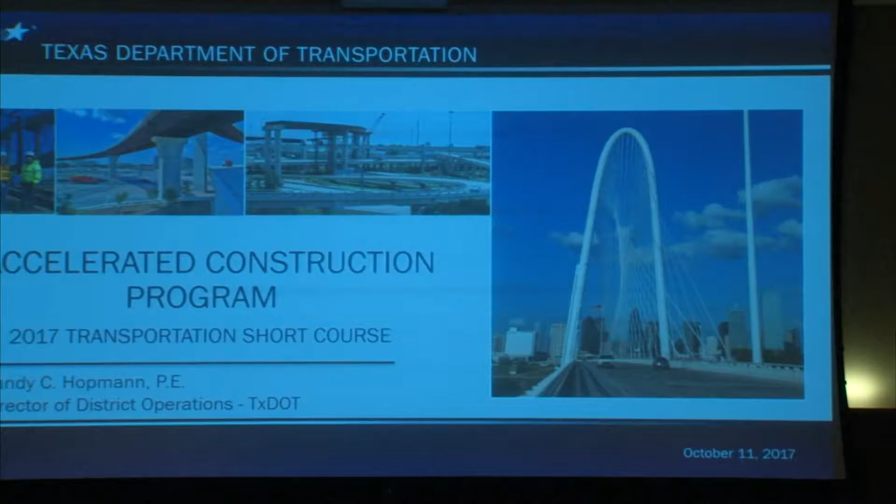We're here to talk about the Accelerated Construction Program, and it kind of came up briefly this morning in the We Build Texas presentation that was done, and this is a subset of the We Build Texas program, really focusing on execution and delivering, particularly of some of our bigger projects, but it's not just limited to our bigger projects.

So what is accelerated construction, and why are we talking about it? Well, some people may think that accelerated construction is when you finish your PS&E and you're putting your construction schedule together and you figure out your production rates so you know how much time to put on the project, that somebody stands up in a meeting and says, you know what, we're just going to cut the contractor 10 or 15% short on time and we're going to make him accelerate. That is not accelerated construction.

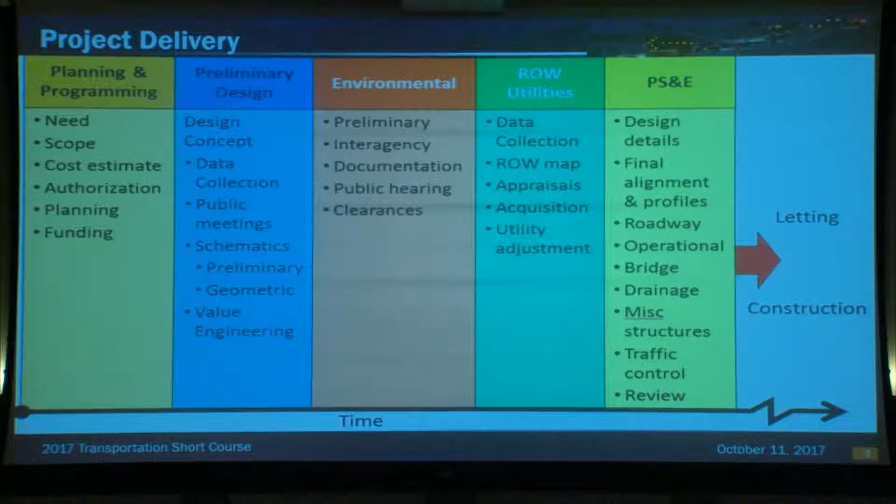Accelerated construction has to start in the preliminary engineering phase of project development, and even back into programming, because it's probably going to cost TxDOT a little bit more money to accelerate these projects. So now we're going to talk about how do you select a project, what are the considerations that go into deciding whether or not a project should be accelerated. But the bottom line of this slide, the decision-making process is at the beginning of the project development process, not the end.

So we have been doing some accelerated construction. It's not a new concept to TxDOT. We've been talking about this for 20 to 30 years now, and in fact, we do accelerate certain projects, and we're accelerating maybe up to 10 or 20% of time on certain projects.

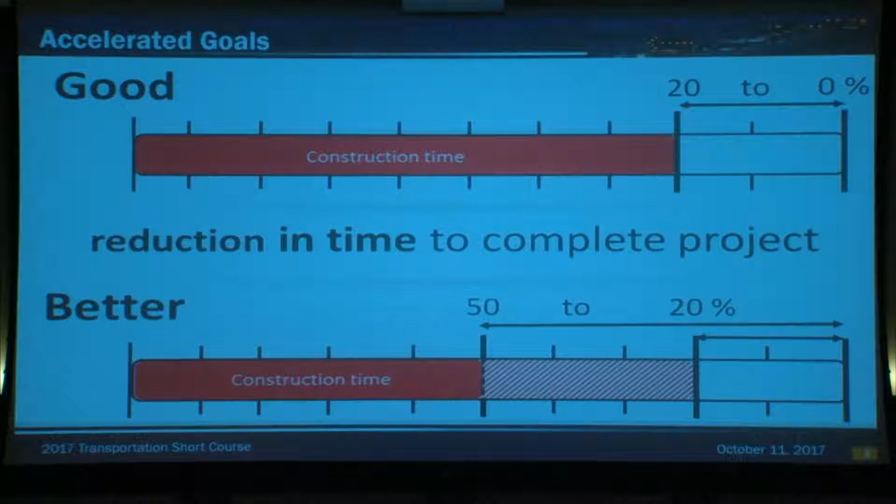But we think that if we really do this right, and we focus on the priorities, and we have a better understanding of the cost associated with the work that we do, and I'm talking about the direct cost as well as the indirect cost, and I'll define what that means, that we could actually accelerate some of these projects and deliver the transportation improvements quicker to our customers to the tune of 20 to 50%. And there's certainly examples we have out there where projects have been accelerated to that amount, if not a little bit more.

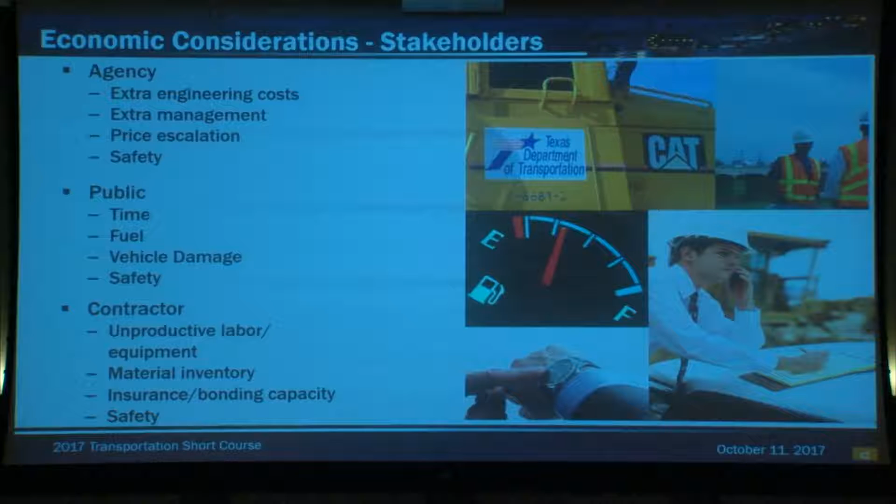There are impacts to the agency, and there are some of those listed there. We've got some increased engineering cost. We're going to have some increased prices to pay on some of these projects. Safety is certainly a consideration, but the public is the one that's really going to benefit from accelerated construction. They're spending their time on the roads. They're spending hours in delayed travel times going through these work zones, and there's certainly damage to their vehicles in certain cases and safety considerations for the public. The contractor, there are some of the things that the contractor has to consider in this accelerated construction program.

So we have direct cost. I mentioned that. We're really good at TxDOT of determining our direct cost of a project. We have 100 years worth of bid prices on how much it costs us to perform certain tasks on a project. What we're not so good at is recognizing the indirect cost, the economic cost to the businesses that may be within our work zones.

What's it cost to them when we have to close one of their driveways so that we can reconstruct the driveway? How does that affect customers getting to their business? We think about that, but we don't assign a cost associated with those types of economic impacts to the adjacent business, as well as the local economic cost associated with our construction work zones. So what we've asked TTI to do is help us develop a tool, and they've done that. They helped us develop a tool that helps us understand the indirect costs.

So now, to determine how much to accelerate a project and how much additional cost the taxpayers should bear to accelerate a construction project, we're not limited to road user costs. That's our traditional way of determining the cost to the users of the system. Now we can look at road user costs, and through this tool that TTI developed, we can also look at the indirect economic impacts associated with our work. Because at the end of the day, all these costs are borne by the public.

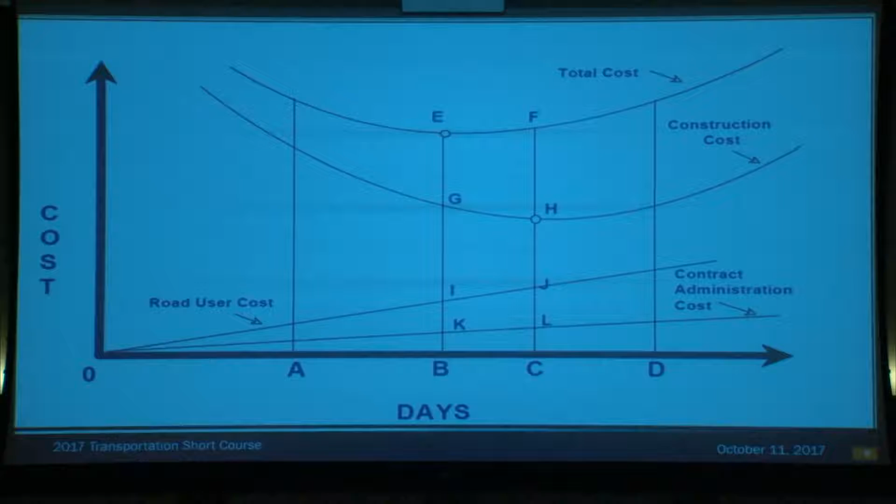So we're looking at construction time and how to reduce it. We talked earlier this morning about how important finishing projects on time is. Of course, the contractors and TxDOT are interested in finishing the projects on budget also. But we have different methods we can employ. We can look at our design bid build program, the traditional program. We can look at our alternative delivery program.

We can look at A+B bidding, which is a good way to have contractors bid time against one another to reduce the length of time on these projects. It's an excellent tool on certain projects. We can have milestones. We can have no excuse incentives in these projects so that we can incentivize the contractors to resource the projects at a higher capacity to help deliver these projects.

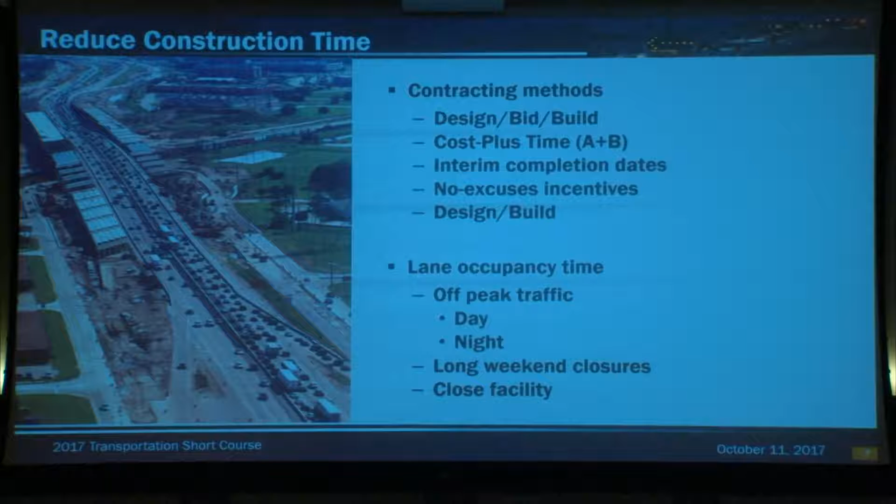And then we can look at lane rentals, which is lane occupancy, and look at the different peak times, day times, weekend times, night times, and we can set the projects up that way and structure them to help incentivize the progression of work to get off the road and deliver the improvements quicker.

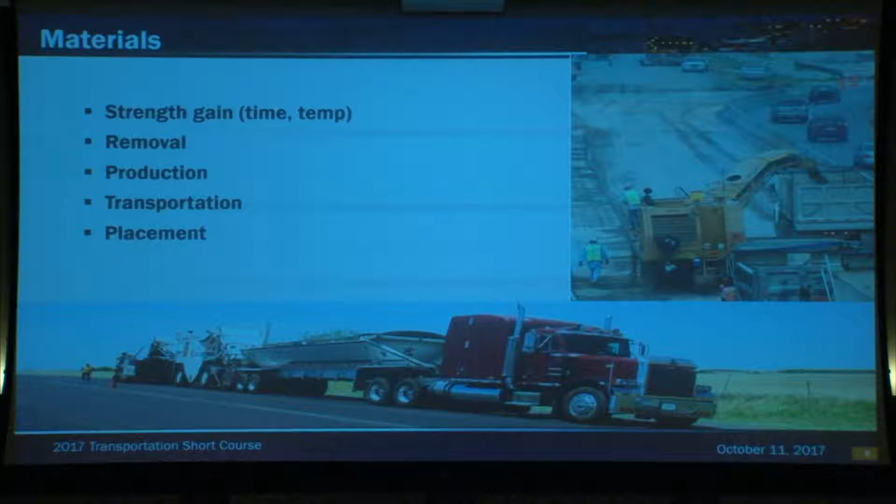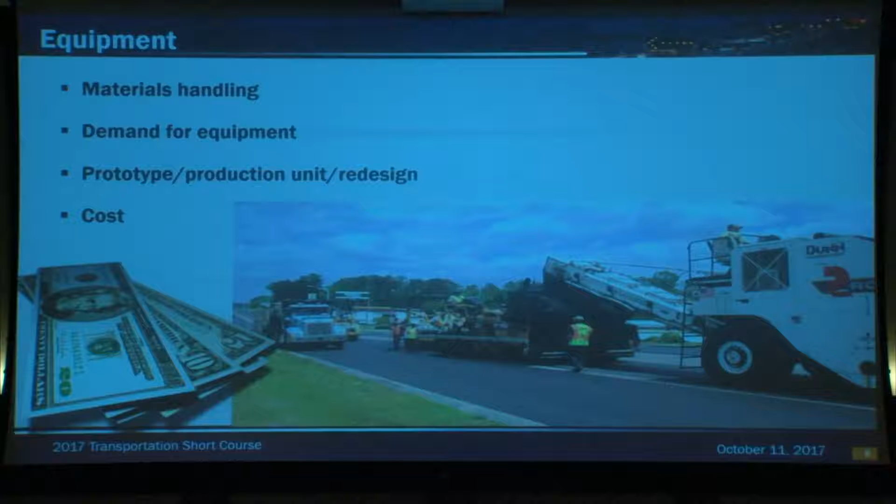There are great material opportunities when you stop and think about how much time and money we spend just moving materials in and out of construction work zones. So maybe there's an opportunity to reuse some of those materials rather than hauling them off and bringing new materials in. We need to take a look at all that. And there's equipment issues here. We've engaged the equipment manufacturing industry to help us maybe invent some new machinery, some new equipment that could help us deliver transportation improvements quicker to our customers.

Well, then we need to also look at quality control. Just because you accelerate something does not mean you sacrifice quality. It does not mean we sacrifice safety of the workers or safety of the public. Those two priorities remain at the top of the list, but we do need to look at perhaps some rapid material testing procedures. We need to look at providing better feedback, quicker feedback to the contractor.

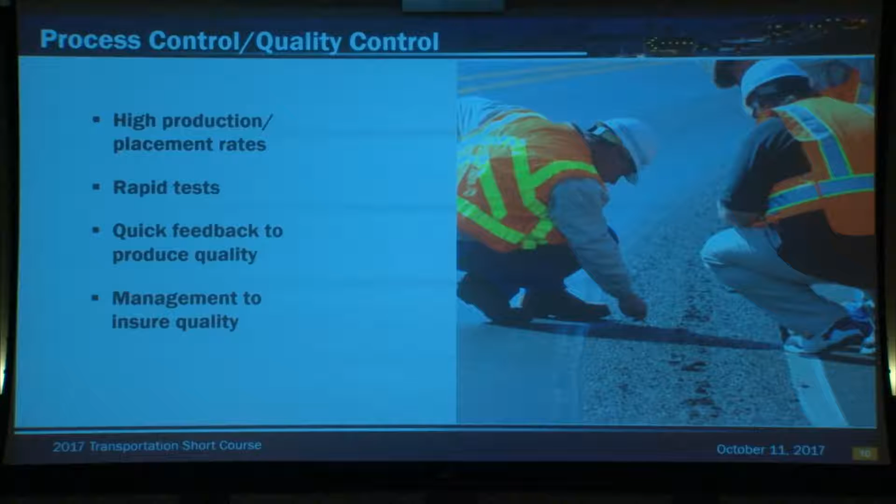If we're going to have the contractor producing at higher rates, we can't afford to wait a week or two to get test results back. Because by then he's long down the road. We're done. We've got it covered up and we're building the road. We're moving on. So we've got to perhaps look at some of our testing methods to make sure it supports this.

But here are the keys to accelerated construction. Look at the planning stages. That's where it has to all begin. Use the indirect cost calculation tool that I mentioned that TTI developed. Isolate construction work from traffic as long as possible so you have work zones. You're not moving traffic control all around all the time. That takes time, that costs money, and there's some delays associated with that as far as building the improvements. Reuse existing materials, maintain lane closures as long as possible.

Innovative approaches to handling traffic. There may be some ideas we haven't even thought about on how to handle traffic in certain situations. And perhaps it means if you're going to redo an intersection, you just close the intersection down for a long weekend and do a 24-hour operation. Get in and out and stay out of that particular area. That's a part of our accelerated construction program.

And this whole thought process needs to be baked into our standard operating procedures in our project development processes. And it's not limited to the big projects. I don't think it's limited to metropolitan district projects. I think there are some rural examples out there that we could take a look at also.

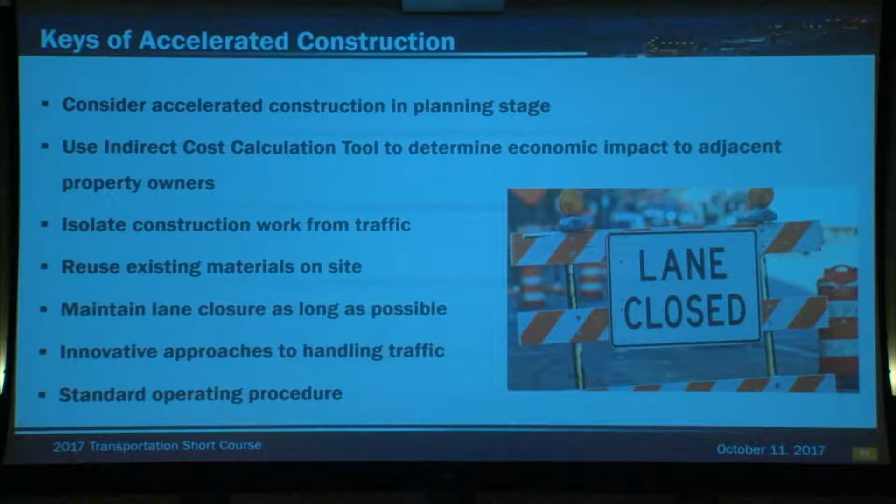So we are hosting 7 regional workshops around the state. We've had 3 so far. We've got 4 more coming up here starting in November, Dr. Epps, and continuing into December. So there is a workshop opportunity coming to you where we go through this in great detail.

We spend a whole day talking about accelerated construction, and the point of the workshops is to get feedback from everybody. Are we doing the right things? Have we thought about everything? Is the tool good? Is it going to help us arrive at the right decisions and the right conclusions?

And then hopefully from your input through the workshops, we will be able to go back and draft more guidance for our districts and perhaps put a policy in place that formally implements accelerated construction. So the bottom line is we've got to be smarter in the projects that we select to implement this on.

It is not for every project. If you come to our workshops, we say that repeatedly all day long. It is not for every project. But I know we're letting projects today that we probably need to consider this on, and should have considered it a few years ago when we were developing the project originally in the preliminary engineering phase.

So with that, I'm going to stop and turn it over to Philip. Does his PowerPoint come up right now?

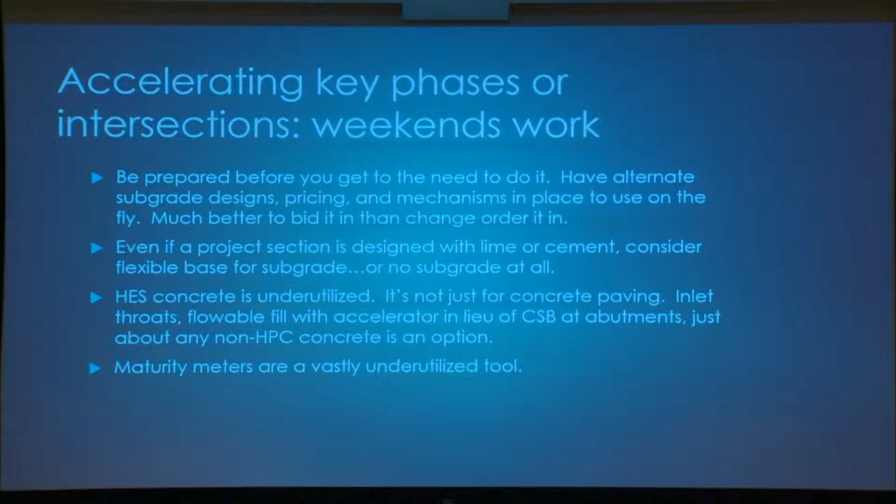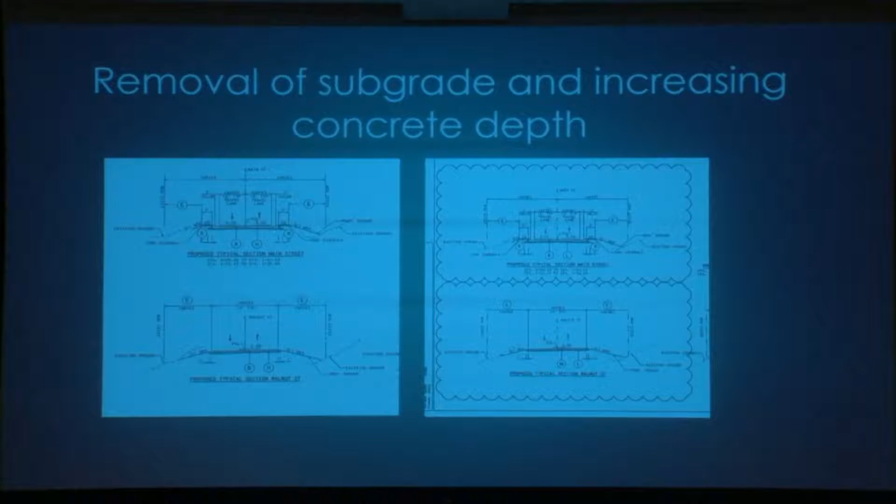So this is an example where I won't stay on it very long, but it was a project where we went in after the fact and we had alternate subgrades. We did it by change order, but now I have seen a project we've bid in DFW in the last couple months where this was in the bid design. You had a subgrade A, subgrade B, and quantities where the engineer was able to choose, which one do I want to use at go time. Makes the process a lot faster.

Utility delays, they're the bane of every contractor and every DOT person sitting in here and every designer. It's something we beat our heads on the wall every day. I guarantee you, if the department and the contractor can realize they've got to work together and lock arms to fix it, they're going to move faster than any franchise utility will ever go. Absolutely. But you've got to be willing to do it. You've got to understand that you're going to do some out-of-the-box things there.

Don't be afraid to think substantially out of the box. Sometimes it's a different foundation, it's a different structure, move things over. Just because maybe in this particular district we've never put the pipe under the roadway with this type of inlet, reach out to your peers down in Austin in design. Maybe there's an inlet somewhere in San Antonio they've used that Dallas has never used. Call somebody and find out what their other options are and find out how to move this over.

Always going to be the most cost-effective option to figure it out. And stop asking when you start running into these problems. Everybody goes and looks immediately to what's in place and goes, well, do I have a pay item to handle this? What's our standard? What does this say in the plans we got to do? Stop there. Really go out, go to the field, look in the hole, look up at the structure, see what the conflict is, and go, what is it going to take to fix this?

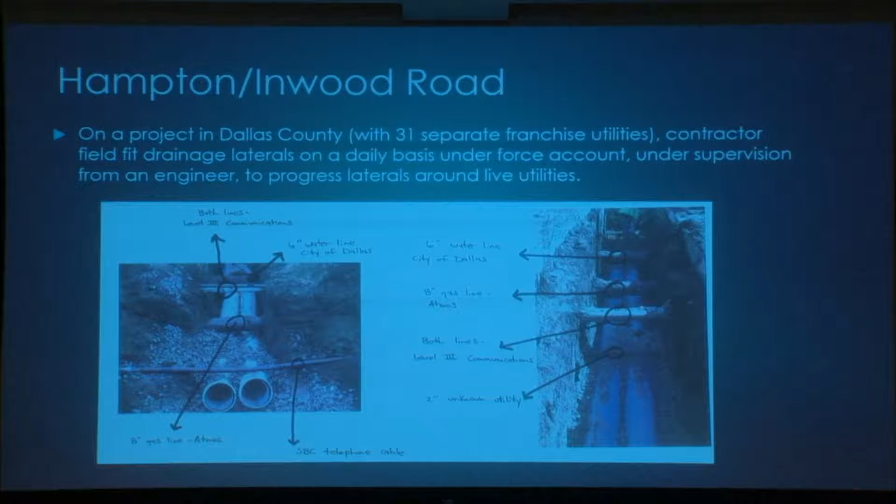We worked through all this, and in a week, we came up with plan sheets, got it out, got it built, added 5 days to the job. 5 days as opposed to how long to move 8 franchise utilities, including multiple gas and fiber lines. It's a big, big difference if you get out of that box.

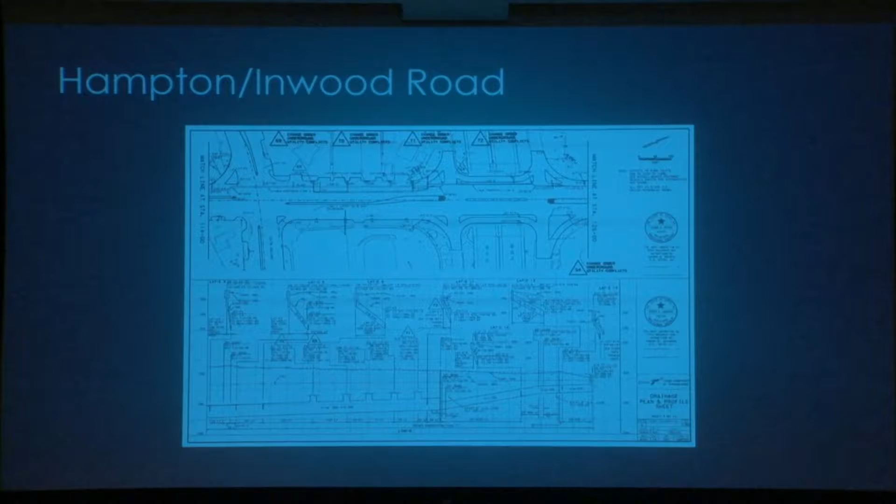Simplify your design. Like I said, contractors are going to be creatures that are all about how do I have repetitive motion? How do I be able to do the same thing over and over without having redone fixed cost, adjusting forms, adjusting paving machines, being able to remobilize, changing designs and hot mix silos.

If you're going to have a curb and gutter section, make sure you think about where that curb and gutter lies on your grade. If you put the asphalt down first and then make you put the curb and gutter on it, and that work has to take place, and then you have to come back with a hot mix, now you've essentially had 2 hot mix mobilizations. Maybe you're lucky and your contractor does hot mix, maybe he doesn't. Now you've added time to that project. You can easily have a section designed quite well with the curb and gutter sitting on the grade.

Try to avoid using multiple types or classes of hot mix in a section. Yes, there are times it's absolutely required, especially on freeways and especially in high traffic areas. But I've seen typical sections that have 5 different classes of hot mix in a 10-inch section. To be honest, it's absolutely ridiculous. Find out the right solution that gives you a strong base layer and get the right surface on it.

Because every time that hot mix contractor has to stop, he's got that in his silo. If you're in some small phase and he's got to change his silo 5 times, that's almost guaranteed 5 days. If you can get it down to 2, now it's 2 days. If you can take an intersection where you're trying to wrap up a project and it's a high volume intersection, the difference between 5 days and 2 days, massive, absolutely massive to the traveling public.

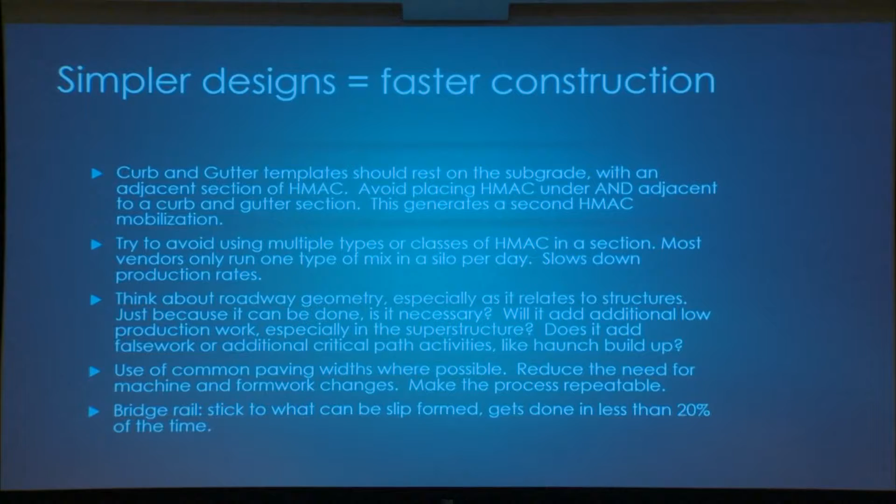Think about sometimes, now it's time to spend the money. I know everybody's concerned with, we've got this money from the taxpayers, we've got these new budgets, how do we stretch more dollars per mile? But think about, how do I really get this done?

Sometimes you'll see that you'll design something and go, well, I'm going to split this road into phase 1 and phase 2 because I don't want to put in 6 miles of barrier. I want to put 3 miles, and then we'll figure out a way to do the next 3 miles, and we split it in half. And you've got a contractor here with resources chomping at the bit to go build the 6 miles. Sometimes it makes sense. Cut the check. Pay for the barrier up front. Get it done that way.

Sometimes think about the barrier types that are out there. We've gone over the last couple of years where barrier is changing types. Some contractors have existing barriers, some don't. Think about what you have and talk to your contractors who work in your area. Know the resources you have and understand that if you've got a job that you're fixing to put 100,000 foot of barrier on, you really need to think about, maybe I need to go to something a little more existing,

because if you let a project 2 months later, this contractor has to go cast 100,000 foot of barrier, there's only 3 vendors in the state of Texas minus a couple contractors who perform this themselves. The odds are you're going to have a delay up front waiting on them to cast barrier. Think about your resources. If you are unsure, reach out to the contracting community and ask them. We'll be happy to tell you what we can do and what we can't do.

Stamp traffic control plans. Make sure and figure out who gets it done fastest. Sometimes we have an engineer on staff, sometimes we have a consultant, sometimes you guys have somebody over design that's available. It doesn't matter who does it. Figure out who the right answer to do it is so it keeps the project moving. If I can get to it in a week and it's going to take you a month, let me do it and cut me the check for it. If my guys are swamped and you've got somebody on site who can do it, absolutely take it yourself and crank it out, but get it done either way.

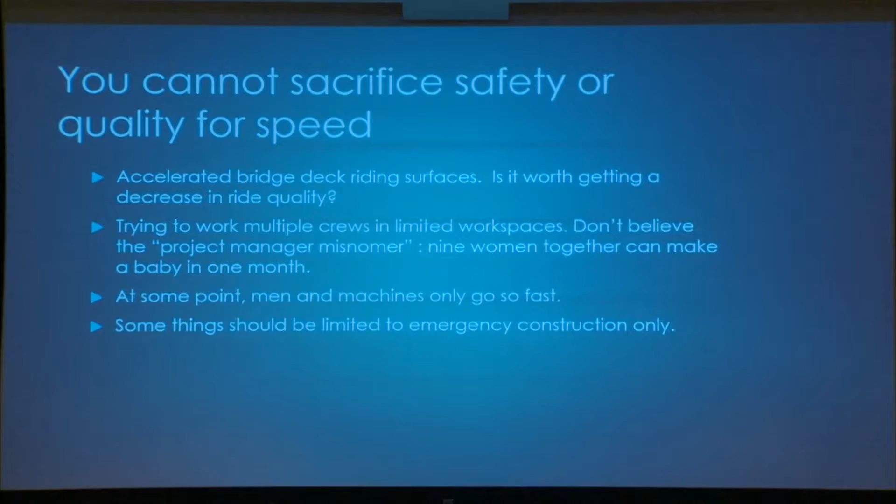To speed up here, the spec book is a guide, supposed to be designed with use for common sense and design parameters. Make sure you see the bigger picture of the forest and the trees. Don't be scared by the perception of regulations and protocol. Avoid that crutch of saying, well, we'll just build it per plan. That's an easy out. Really put some thought into it. Those words should really be uttered after a full decision-making process is done and you've put some thought into it.

And build that flexibility in, set your engineer and your contractor up for success so they have those options later and they can actually get things done on time. You can always put those options in and not use them. Some things you really need to think about: 9 to 3:30 closure restrictions. If you're on 635 or 410 or 610 or Trans Mountain, we can talk about that. If you're on Farm to Market 9999 in County X, what are you really getting for that? You're going to inconvenience some traveling public, but what am I really going to get done with 5.5 hours of critical path work per day?

Sometimes you need to take that phone call from an angry citizen. They're going to be angry anyway. It doesn't matter if you were out there for 2 years or 2 weeks, they're going to be mad. I have engineers that get called on day one when we've gone out there and set the signs up and they're already losing their mind. Don't be scared of that. If you have a major urban project and a metro project, yes, those restrictions have a place. As you start getting out into the suburban and rural areas, think about that before you put in a set of plans. That is amazingly handicapping. Make sure that you just get it done as quick as possible if you can.

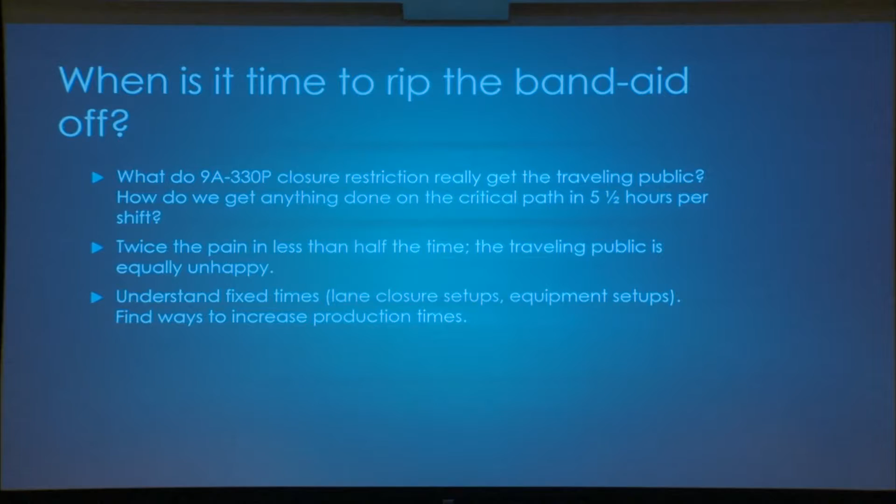Think about what your contractor's fixed times are. It doesn't matter if he goes out and works for 1 hour on the road or 20 hours on the road, he's going to lose an hour on either side of setting up that lane closure. If he goes to work 10 hours and you get 2 hours, 80% of his shift was working. If you let him work 5 hours and 2 hours of that, now 60% of his shift is working. Really think about what you're handicapping him there.

Partnering takes effort and want to. Make sure you empower your personnel to make field level decisions. We had talked about this in an event last night. Quit micromanaging. Let your people make decisions, set up a structure for them to make decisions, and have them where they can come and ask you for help. Stop telling contractors, well, I got X amount of days to review this, I'll get to it when I get to it. If it's the project moving along, get out of your desk, walk across the district, walk across to bridge design, find a hydraulic engineer, call your CE&I guy. If this is the difference between the activity waiting a month or a week, it doesn't matter how many days you got to review it. Every day you take delays the job. Move it along. Take an active role in that.

Don't plan for if something goes wrong, but plan for when it goes wrong. And like I said, you can set a number of solutions in place and never use them. Just because it's a last minute idea doesn't mean it's too late, even if you come up with something the day before. Maybe it's too late to enact that. Talk about it. Have a meeting. Listen to the plan. Work towards your contractor being successful.

Don't make your set of plans a puzzle. I've had too many designers over the years where I go, well, what does this mean and what does that mean? How do you really think about this? He goes, well, all the information's there. Yeah, but don't you think if you spent a few minutes to put a little extra sentence in there, I can guarantee that I build what you've paid me to build and you got a happy product? Think about that.

Neither side should have surprises waiting for them. Make sure you have open and honest communication. If you can put two sentences in the plan instead of one that clarify it, put the two sentences. Paper's cheap and we're all digital now. It's really not costing you any money.